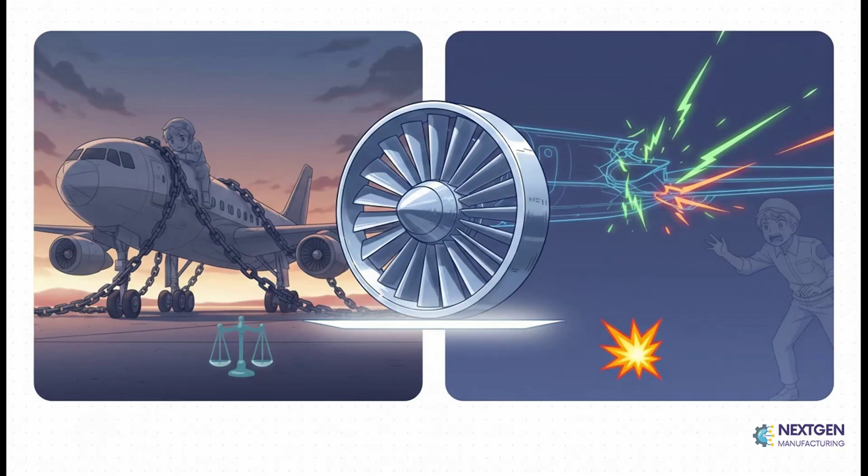Okay, so that brings us to the fundamental problem that every aerospace engineer wakes up thinking about. They are in a constant battle with a paradox, one that's dictated by the laws of physics itself. It really is a constant, high-stakes balancing act.

On one side, a part has to be unbelievably strong to handle all the forces of flight. But on the other side, if you make it too heavy, the plane either guzzles fuel, or worse, it can't even get off the ground. The perfect part lives right on that razor's edge between being too heavy and being too weak.

So how do you solve this impossible strength versus weight problem? Well, you invent a new generation of what can only be called supermaterials. And believe me, this isn't the kind of metal you'd find at a hardware store. These are cooked up in labs specifically for the insane demands of flight. We're talking about some amazing stuff here.

You've got your advanced aluminum alloys. They're kind of the versatile workhorse of the industry. Then you have titanium, which is just legendary for its raw strength and how well it handles scorching temperatures. And of course, carbon fiber composites, which give you this almost unbelievable jaw-dropping strength in a package that's shockingly light.

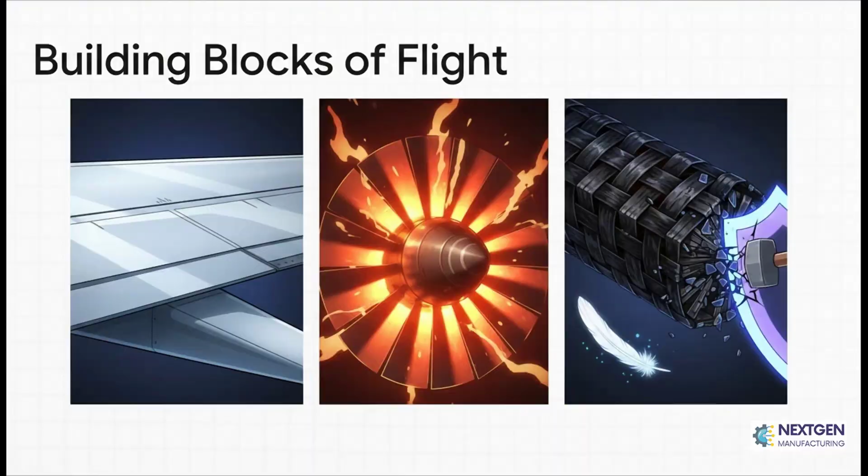Okay, so we've got our supermaterials. Problem solved, right? Well, not so fast. This actually creates the next huge challenge. You see, the very thing that makes these materials so strong also makes them incredibly, notoriously difficult to shape and work with. For the most part, the answer is CNC machining.

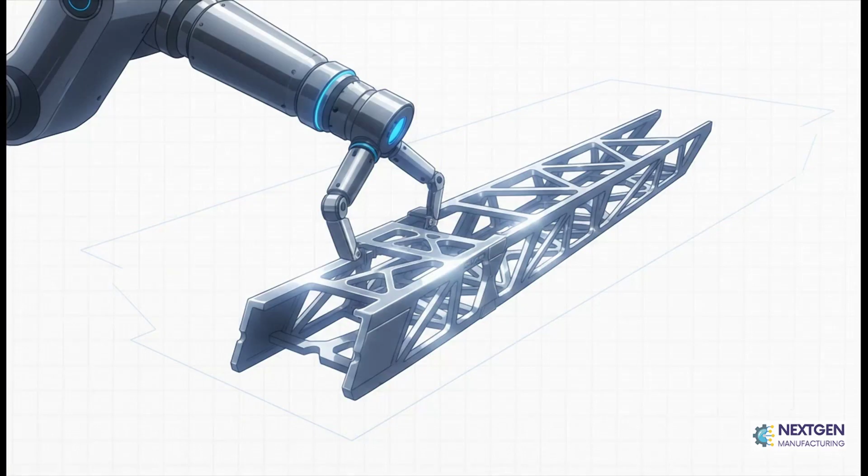And then, after hours, sometimes even days, locked inside a CNC machine, that block transforms into this, a beautiful, complex, and precisely engineered component. This whole process is called subtractive manufacturing, for the obvious reason that you're subtracting or removing material to get to your final shape.

And this journey from that raw block to a finished part is just mind-bogglingly complex. I mean, look at this flow chart. It's not just one step. A single part goes through receiving, drilling, machining, and then a whole gauntlet of inspections, special treatments, cleaning, painting, you name it. Every single one of those steps adds time, it adds cost, and it adds another chance for something to go wrong.

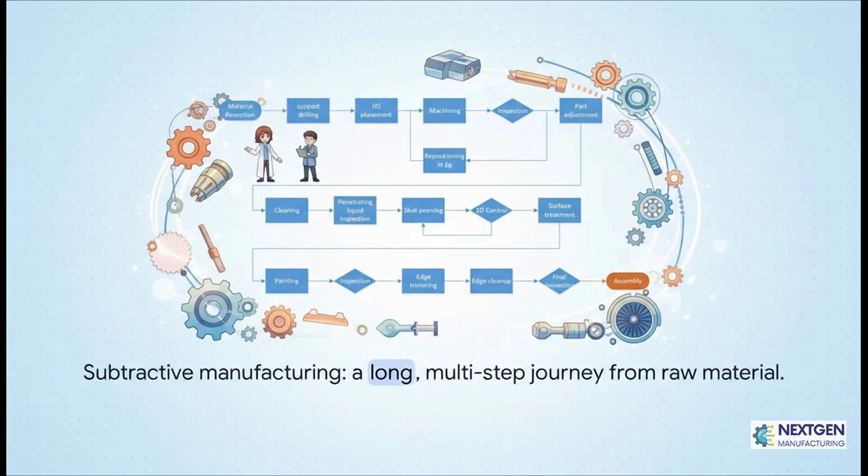Now, when we talk about composites like carbon fiber, it's a totally different ballgame. Instead of carving material away, you're actually building the part up one super thin layer at a time. This is what's known as an additive process.

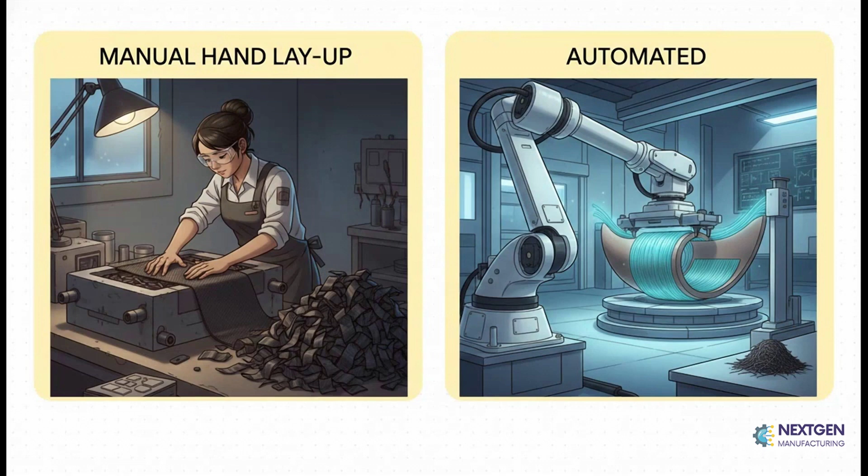The old school way was to do this all by hand, which was painfully slow and, get this, created a scrap rate of up to 30%. Automation has totally changed everything. And in the world of automation, you've got two main players.

On one side, there's automated tape laying, or ATL. It uses these really wide tapes of material, so it's perfect for making huge, relatively flat things, like the skin of a wing. Then you have automated fiber placement, or AFP. It uses much narrower strands, which lets it build these incredibly complex, curvy shapes with almost no waste.

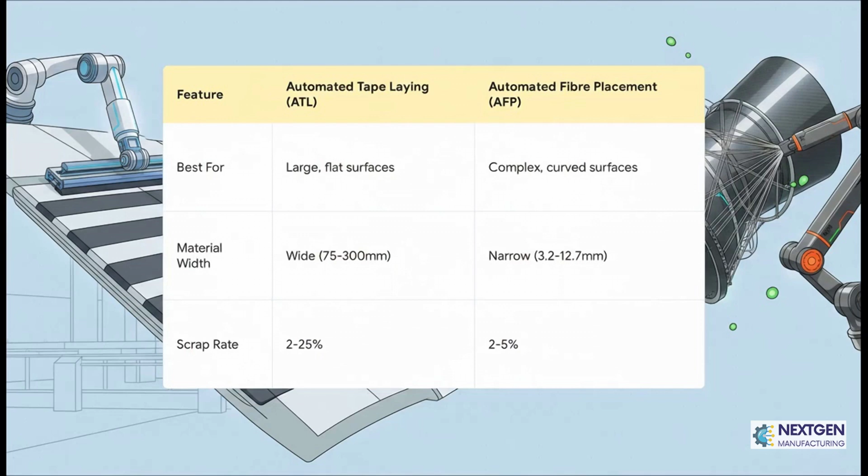It's pretty amazing. So you've got these incredible materials, and you're using these super advanced manufacturing techniques. But how does that all add up to the frankly staggering price tag for just one part? Okay, let's break down the economics of perfection.

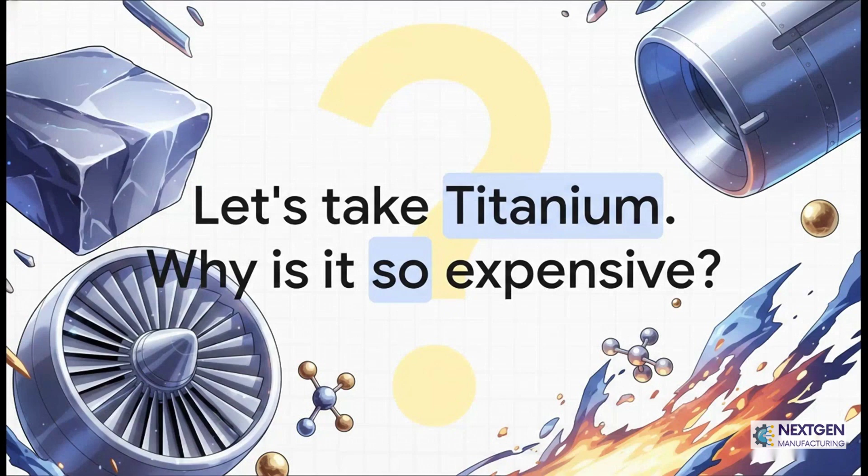You know what? Let's just use titanium as our example. It's famous for being one of the most expensive materials out there, and the reasons why it's so pricey really tell the story of the whole industry. It all starts right at the beginning, with the raw material itself. To get titanium, you have to dig it out of the ground as mineral ore.

So let's say we start with 11 kilograms of this raw ore. Well, after you put it through a really complex and energy-hungry refining process, that 11 kilograms of rock gives you just 1 single kilogram of usable titanium metal. Think about that. A huge chunk of the cost is baked in before you've even started to make anything.

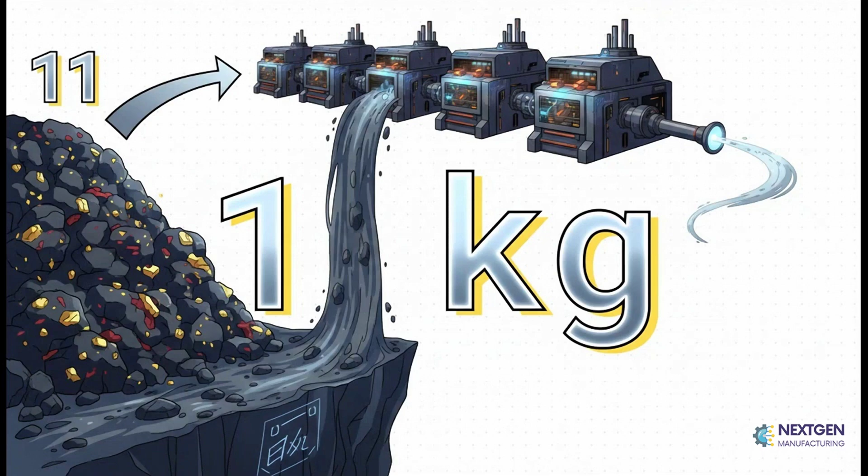But oh, it gets so much more expensive once you try to actually cut it. Titanium is so tough that it just shreds the cutting tools you use on it. It's also terrible at conducting heat, so you have to machine it really slowly, and you have to blast it with high-pressure coolants the entire time. All of that adds a ton of time and money to the whole process.

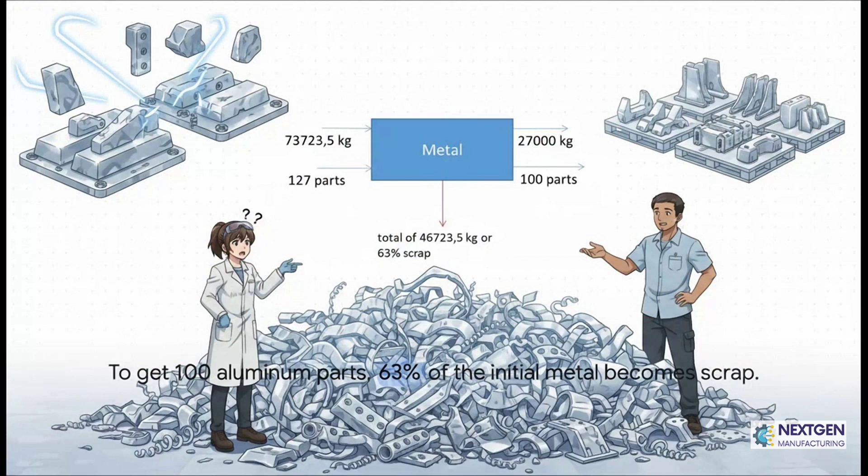And that brings us to the biggest hidden cost of all, waste. Just look at this example for aluminum, which is way more common than titanium. To get just 100 finished parts, more than 46,000 kilograms, that's 63% of the starting material, ends up as scrap shavings on the factory floor. That is an insane amount of expensive metal that you paid for, but will never fly.

So after all this intense manufacturing, we get to the final and, honestly, the most critical cost of all, the absolute demand for total safety. With millions of parts being made by thousands of suppliers all over the world, how in the world do you guarantee that every single one is perfect?

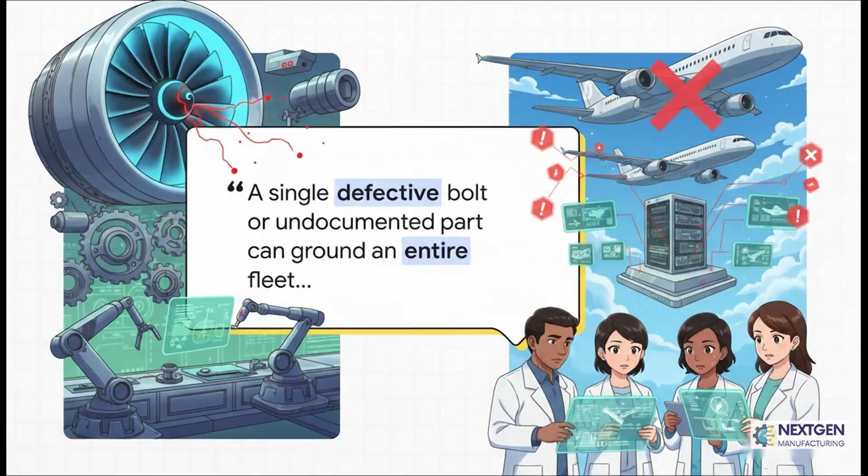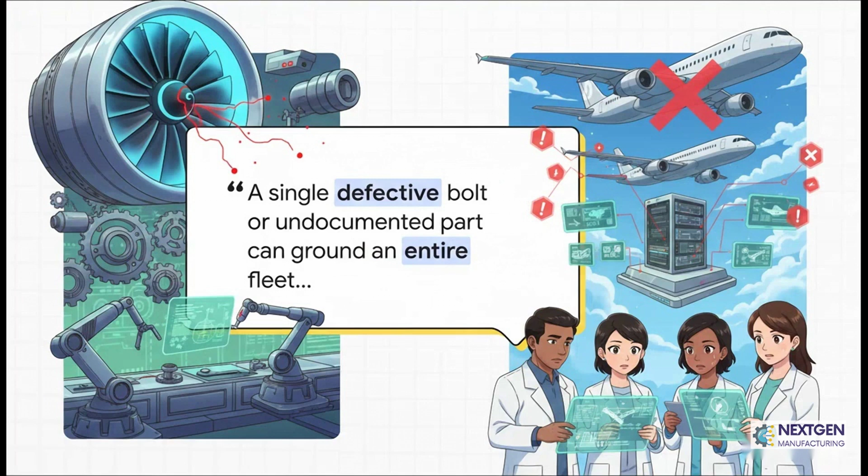Yeah, this quote from Pico MES really says it all, doesn't it? The fallout from just one bad part is so unbelievably severe that the industry has to pour massive resources into systems that prevent it from ever happening. The industry's answer to this is something called digital traceability. Basically, it's like creating a digital passport for every single part.

It tracks everything, where the raw material came from, which person worked on it, which machine cut it, every inspection result. It's a complete digital life story for every component. And if you think this is all just theoretical, it's not.

Look no further than the 2024 Alaska Airlines incident where a door plug blew out in midair. Investigators now believe that 4 critical bolts were taken out during assembly and just never put back in. A solid traceability system is designed to catch exactly that kind of human error before it can become a disaster.

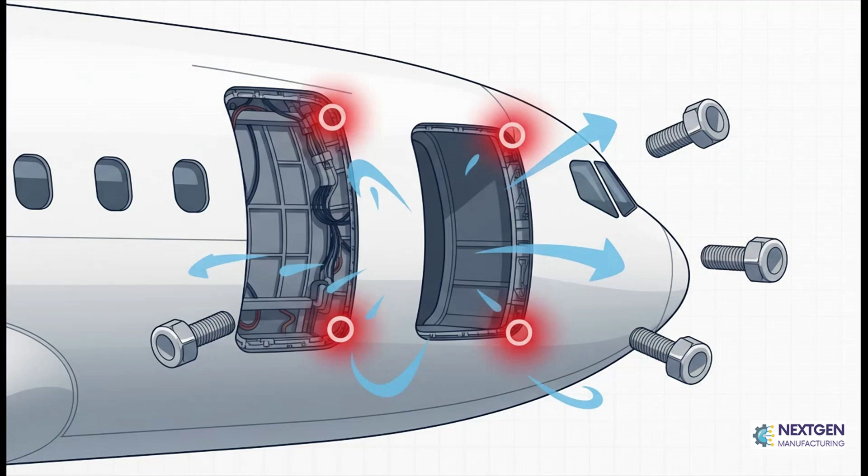So when you add it all up, from the impossible materials to the precision manufacturing to a system of total digital accountability, every single step adds cost. But it's that very cost that keeps us all safe when we fly. And it leaves us with one big question. As our materials get even stronger and our designs get even more complex, what's going to be the next big breakthrough that builds the future of flight?